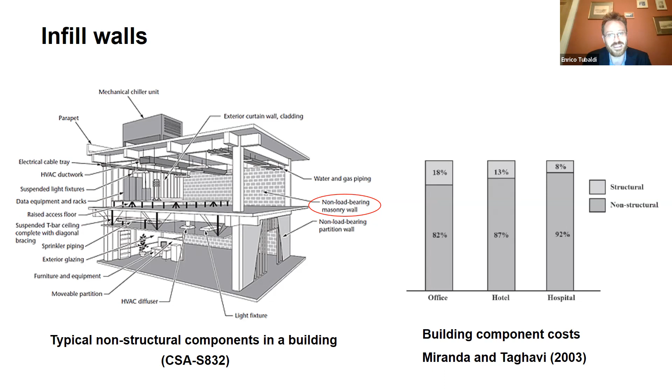These are tables taken from a recent publication, showing that the overall cost for repairing infill walls in buildings in Aquila that were not completely collapsed and demolished, but were repaired after the earthquake. The contribution of the repair of the infills is on the order of 40 to 60% of the overall cost of repair of these buildings.

This gives you an idea of how important the direct losses due to infill wall damage are, and there's no need to mention how important also are the potential indirect losses arising from the damage to infill walls.

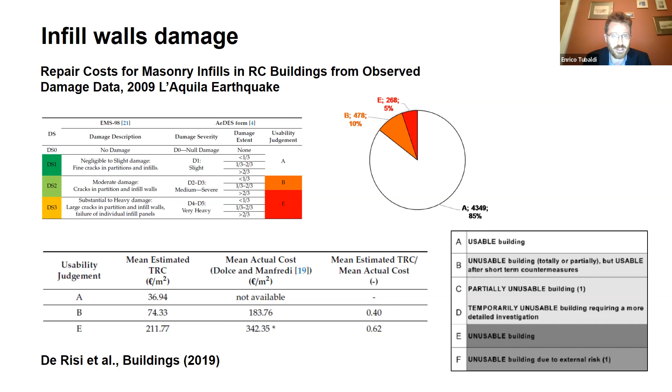I had the opportunity to visit some towns in central Italy after a notable earthquake sequence a few years ago, and I was in Fabriano and spotted lots of buildings that were not really damaged in the structural components, but had this type of double leaf infill walls that collapsed.

Not far from the building on the left, there is a school, a reinforced concrete building that was retrofitted prior to the earthquakes with the addition of high damping natural rubber dampers. These dampers were designed by TARRC Rubber Research Center, in particular by Hamid Ahmadi. Thanks to this, the school building didn't experience any damage during these earthquakes.

Now, looking at these two pictures, one may already come up with the idea of why not combine these two systems, the infill wall and the rubber-based dampers, into a single system that can exhibit better performance under earthquake loading, so that the infill wall is not damaged, and we are also able to improve the performance of the reinforced concrete frame by adding a source of energy dissipation. This is the idea at the base of the use of rubber joints within infill walls, as I will show you later.

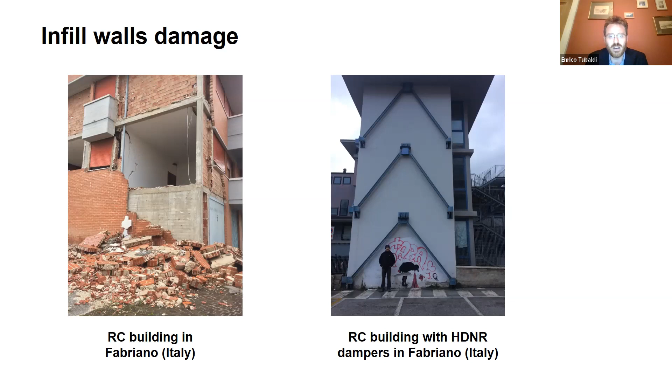But first, let's make a brief description of the techniques for infill wall protection that are already available or have been developed in recent years. I've classified them into two categories: the first are techniques aimed at increasing infill resistance, and the second is the class of techniques aimed at minimizing the infill-frame interaction.

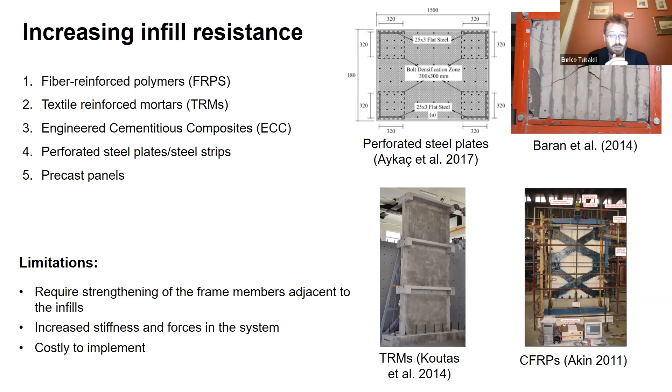In the first category, we have fiber reinforced polymers or reinforced plasters aimed at increasing the resistance of the infill. But these techniques have several limitations, in my opinion, because they result in increased stiffness and forces in the system, which is very bad for non-structural components, particularly acceleration-sensitive ones. They often require strengthening of the frame members adjacent to the infills and are usually costly to implement.

On the other side of the spectrum, we have techniques that aim to minimize the interaction between the infill and the frame, or increase the flexibility of the infill. For example, using locked brick infills, introducing gaps between the infill and the frame, or using sliding flexible layers between the mortar joints or between the infill and the frame. These, in my opinion, are very advantageous thanks to minimal interaction with the building's structural components, reduced increase of global stiffness of the system, and the fact that in some situations they may add energy dissipation to the system.

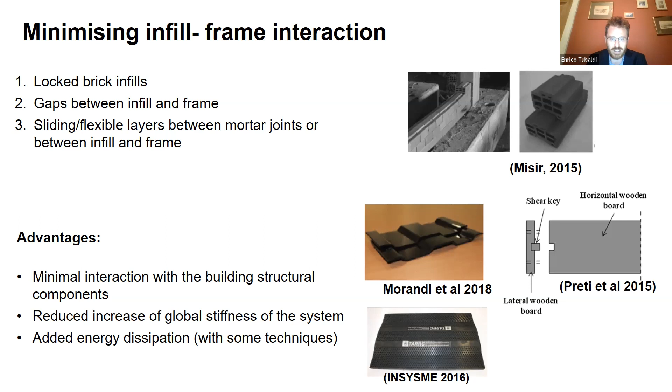The INSYSME project was an EU-funded project that ran between 2013 and 2016, and within this project, some of these techniques for protecting infills were explored.

And among these techniques, the most promising one that emerged was the one involving the use of these rubber joints in the form of horizontal layers that basically divide the infill panel into a series of subpanels, and the vertical layers that are placed between the infill panel and the columns.

TARRC Rubber Research Center have developed two types of joints, DRES-V1 and V2, that have this special shape in order to achieve a sort of orthotropic behavior, which is preferable to improve the out-of-plane capacity of the infill wall. And DRES-V2 presents a series of pins in order to improve the bond between the rubber and the mortar.

And then there are other types of joints that are commercially available and also made from recycled rubber in order to reduce further the cost of the technique.

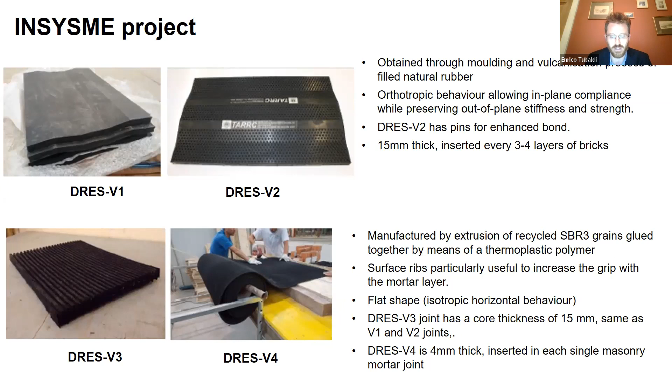And in the INSYSME project, in particular, University of Padua have provided a proof of concept of this technology by performing a series of quasi-static tests, in plane and out of plane.

So basically, they built a series of reinforced concrete frames and filled them with different typologies of infills. So on the right, you see a traditional type of infill wall construction. On the left, the infill wall with the rubber joints.

These have been tested first under in-plane loading by pushing them up to drift levels of 2.4%. That corresponds to a quite significant deflection for the system. And this has resulted in severe cracking in the traditional infill frame and also crushing in the blocks for the traditional infill frame.

Whereas you see for the same level of deflections, the infill wall with the rubber joints experience almost no damage.

On the right, you see the static responses of the two systems, and it's already very evident that the system with the rubber joints is characterized by more stable and fat cycles with an equivalent damping ratio, which is of the order of 11 and 12%, and is significantly higher than the one that is achieved normally in traditional infill structures.

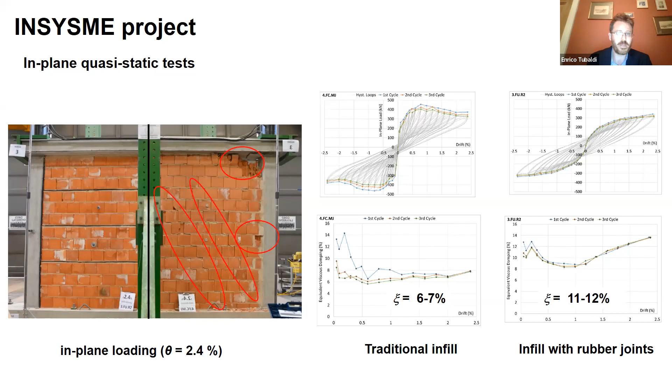And then obviously minimizing the in-plane damage has also benefit in terms of improving the performance under out-of-plane loading. And further tests carried out at University of Padua has shown how with the rubber joints it's possible to achieve out-of-plane capacity that are comparable to the ones that will be obtained for the traditional infill case.

Now, the INSYSME project has provided a very nice proof of concept and demonstration of the capabilities of this technology, but has also left us with a series of knowledge gaps that need to be filled.

And here comes the work carried out thanks to the EEFIT prize on advancing the modeling of RC frames with infill rubber joints and on experimental testing for characterization of rubber mortar joints. So I'm going to describe this now, starting from the first.

Whose research objectives were to develop advanced modeling strategies for the assessment of the type of structure at hand, and also develop simplified modeling strategies suitable for investigating larger structures. And then another objective was to provide some recommendation for the optimal design of the rubber joints.

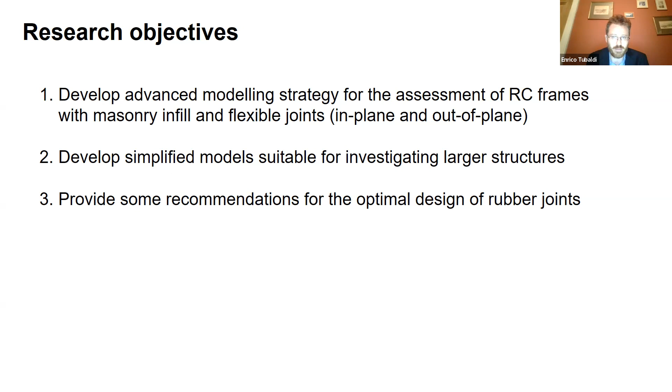So now there are different techniques that can be adopted for modeling the infill panel with the rubber joints. And we have explored, in particular, a mesoscale modeling approach, a macroscale modeling approach, and a microscale modeling approach that I'm going to discuss more in detail in the next slides.

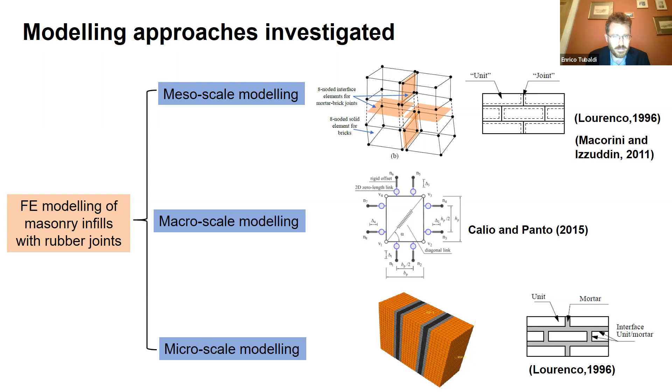So the mesoscale modeling approach for the infill construction basically involves using a set of solid elements for describing the bricks. So basically for each brick, we have at least one solid element, but usually we have more than one. And these solid elements are then connected one to each other through zero thickness interfaces. So that corresponds basically to shrinking the actual thickness of the joint, that is a few centimeters, into a zero thickness element without losing much of accuracy in the response assessment.

And then we use also interfaces for describing the interaction between the infill panel and the adjacent RC members. And for the RC members, we can use different type of description. In this work and this research that has been recently published in Engineering Structures, in particular, we use, again, solid elements and embedded rebars for the steel reinforcement.

So now the core of this modeling strategy is the description of the zero thickness interfaces that must be capable of describing the main failure modes typical of masonry, such as cracking under tensile stresses or shear failure once the cohesion and the friction capacity of the bond is overcome. For this purpose, we have employed interfaces available in Abaqus with an uncoupled elastic response and with some damage model that describes the peak and post-peak behavior.

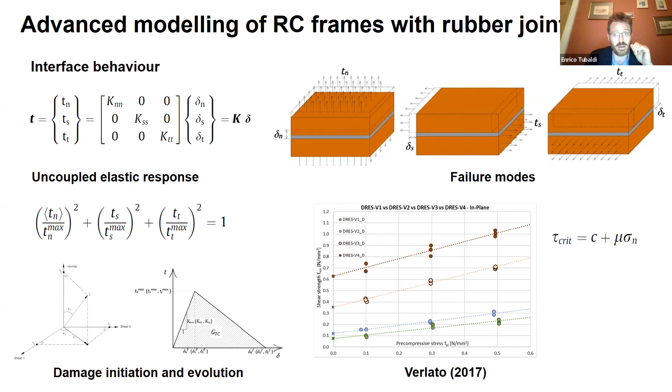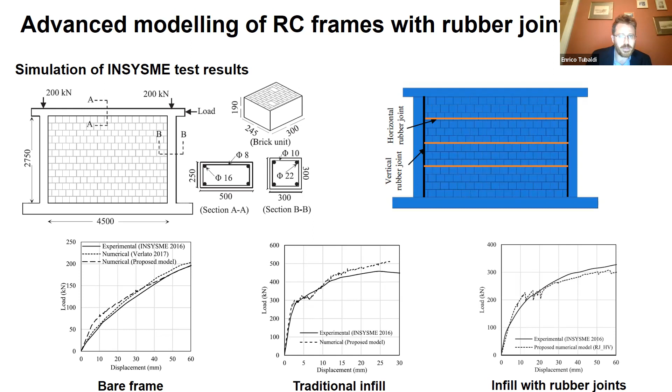And on the right, you see the so-called pushover curve, so the load displacement curve under in-plane loading, for the case of bare frame, traditional infill frame, and frame with infill and rubber joints. And this shows that the rubber joints are effective in increasing the flexibility of the system and reducing the interaction between the infill and the frame, so that the response of the system is quite close to that of the bare frame, as sought.

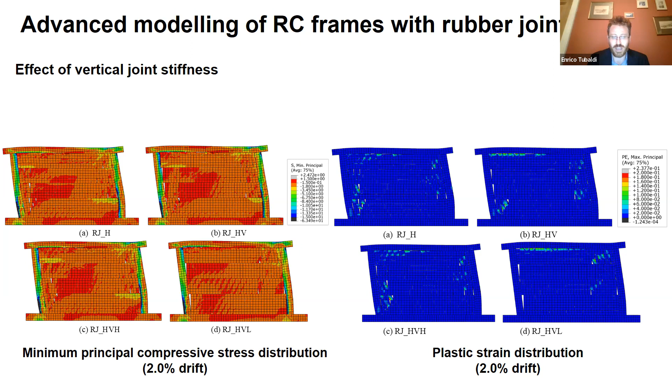However, you can already have an idea of how computationally expensive such a technique can be, so that it cannot be really employed for simulating the response of larger scale structures under dynamic loading. And for this purpose, we've been doing some work towards the development of a macro modeling strategy for simulating the problem at hand, using a reduced number of degrees of freedom and a few parameters required to define them.

Some of you may be already familiar with the use of strut elements for simulating the response of frames with infills. More sophisticated elements, such as these macro elements here, have been developed throughout the years. And we have worked together with Caliò and Pantò, together with Pratik, and we have, in particular, used their macro model for our problem. Their macro model consists in a simple articulated quadrilateral, shown here, with a diagonal link and a series of links located along the edges that describe the interaction between adjacent macro elements when subjected to sliding or axial actions.

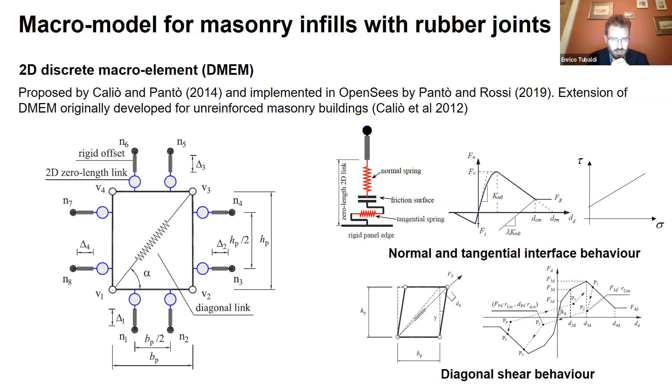And this type of macro element, recently implemented in OpenSees, is capable of describing the most critical failure mechanisms characteristic of infilled structures, particularly the masonry component, such as masonry crushing, sliding crack formation, diagonal crack formation, as well as the detachment between the infill and the frame. Obviously, we needed to expand this macro element a bit in order to make it suitable for our problem, and there is no time really to describe in detail this research that is going to be published soon.

Anyway, the most critical parameters for these elements are the parameters that control the behavior of these springs here that represent essentially the behavior of the horizontal joints, where most of the deflections are localized, basically.

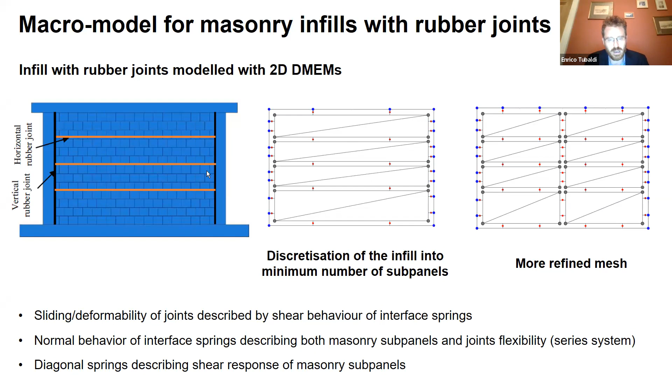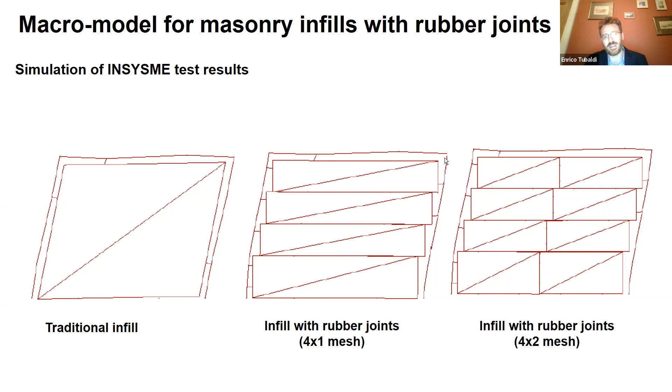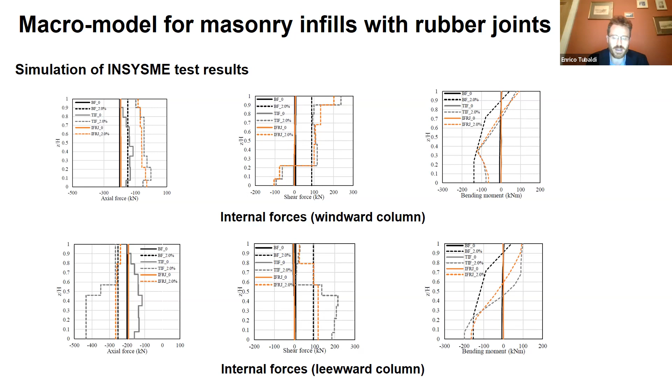We have made some comparisons also with the pushover curves and the cyclic responses, and the proposed modeling strategy provides a very good fit to the experimental test results. And we use also force-based formulation for the adjacent column and beam members, and this allows us to have an idea of the internal forces arising within the reinforced concrete frame due to the interaction with the infill. And in general, we have observed that the case with rubber joints results in reduced internal forces in the columns compared to the case with the traditional infill, or even to the bare frame.

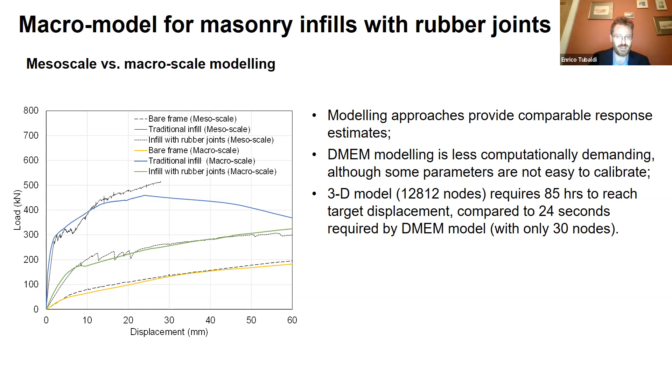So now I'm going to move quickly to the other topic, the experimental testing of masonry triplets. And the research objectives of this task were to investigate the energy dissipation capabilities of the mortar rubber joints, characterize experimentally the hysteretic behavior and capacity of the triplets with mortar rubber joints, and calibrate alternative models for simulating the response of these devices and the infilled frame.

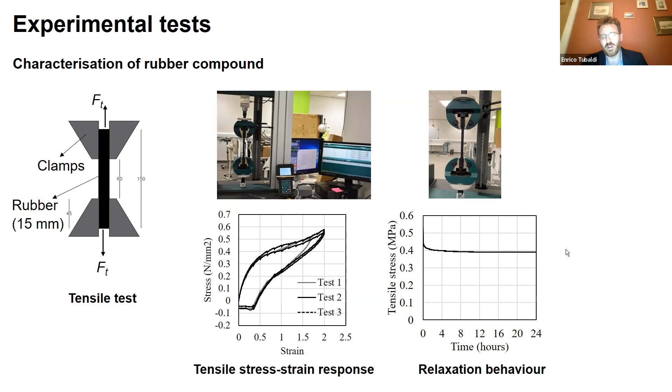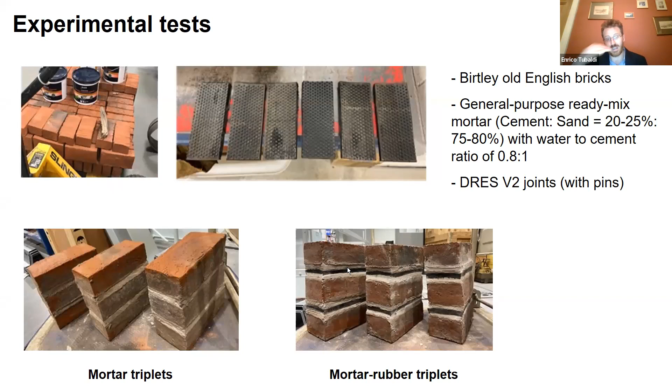And then Pratik has produced a series of triplets made by using Birtley old English bricks that were available locally, and bonding them using a traditional technique involving only mortar, or using the mortar rubber joint alternate layers. And then we have developed a quite unconventional test setup for testing these triplets. This setup is unconventional in the sense that the traditional test setup, the one acknowledged also by the Eurocodes, allows to test the triplets only under monotonic loading. Here, on the other hand, by adding a few threaded bars and plates, we are able also to test the triplets under cyclic loading, which is very important in order to gain insight into the hysteretic behavior of the joints.

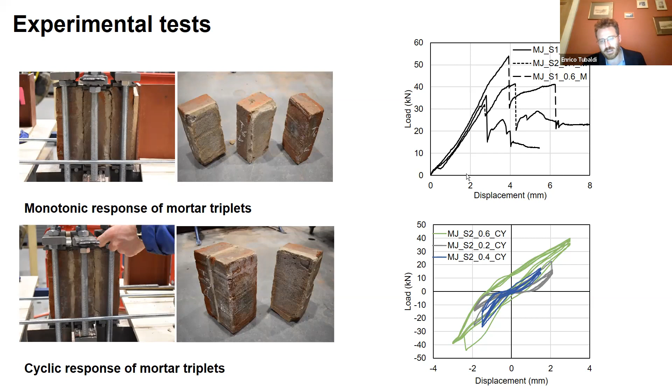In general, we have observed that for all the tested triplets, failure occurred in correspondence of the bond between the rubber and the mortar, despite the use of these pins that are supposed to increase a bit the bond capacity. So this bond is actually the weakest link of the system. This is a quite important result.

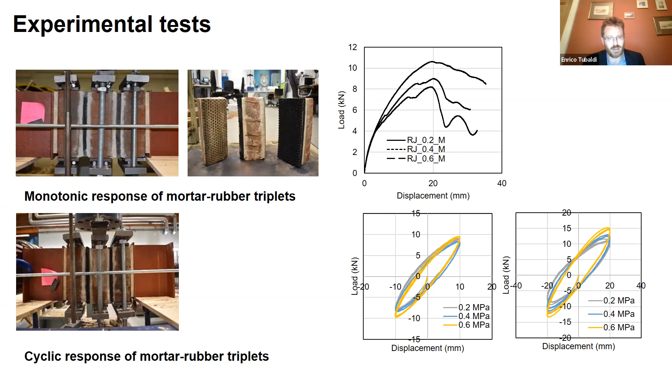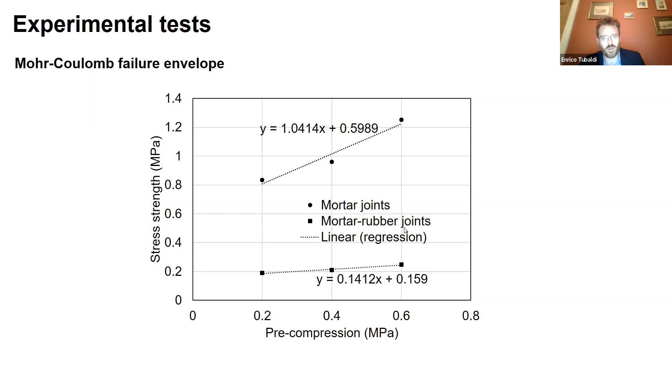We have also been able to fit the Mohr-Coulomb failure envelope, the Mohr-Coulomb criterion for the failure of the bond in the case of traditional mortar joints or mortar-rubber joints, and these have been used to inform a numerical modeling strategy. This numerical modeling strategy is a micro-scale strategy because here we are using solid elements also for describing the behavior of the joints. This is different from the mesoscale approach where we use zero-thickness interfaces.

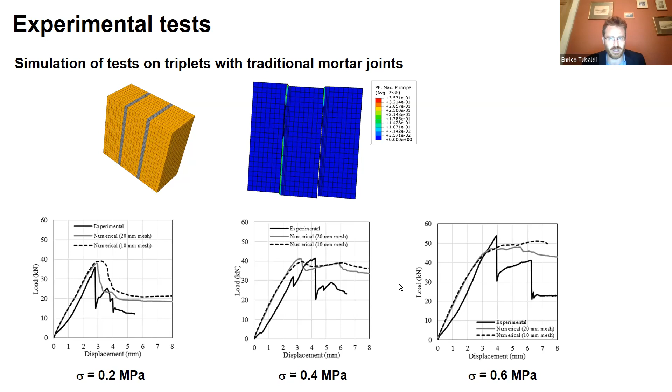And this type of strategy is unavoidable for the problem at hand because the models available for the interfaces are overall quite poor and are not able to capture the very complex behavior characteristic of the rubber joints. Again, some comparison with experimental results here for the traditional mortar joints. And then we move to the rubber case.

And obviously, in order to describe the rubber, first we need to fit a reliable model for describing the material. And this has been done considering the tests carried out on the rubber pieces. And we've been able to fit quite well a material model that employs in parallel a Yeoh hyperelastic material model plus a hysteresis model from Bergstrom and Boyce. And the parameters of these have been calibrated against tensile test, shear test, and relaxation test, with a very good fit being obtained.

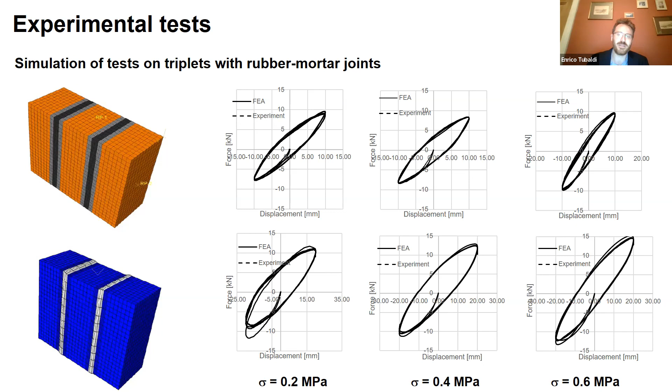And then using this model of the rubber, you see here we have developed the model of the triplets, considering also the actual thickness of the rubber as well as of the mortar layers. And on the right, you see the comparison between finite element analysis and experimental results for all the cycles of deformation imposed, considering different amplitudes and also different precompression levels. And we are very surprised that there is an almost perfect match between experimental results and finite element analysis results. This is even too good for us.

So some final remarks on the experimental test. We have developed an experimental setup that is quite unconventional and that has allowed us to investigate the cyclic behavior of the triplets. We have found that the rubber layer-mortar bond is the weakest component of the triplets. And this is very important. It means that we need to do some more work in order to enhance the bond behavior in order to be able to fully exploit the capabilities of the rubber in dissipating energy, even though we must say that failure of the bond doesn't imply failure of the system. And we can still rely on the frictional sliding to dissipate energy.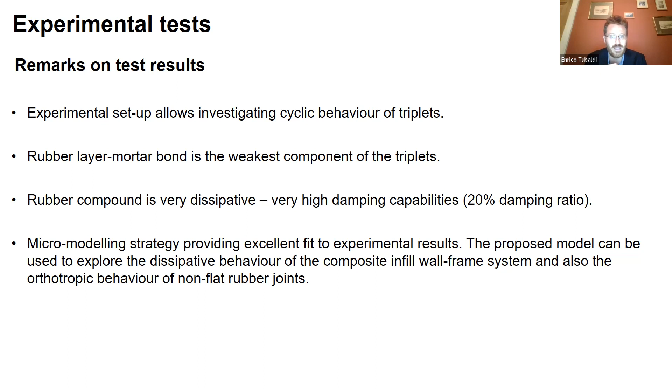We have also found that the rubber compound is very dissipative and characterized by very good damping capabilities that definitely need to be exploited in order to protect the frame. And we have defined and calibrated a micro modeling strategy that has provided an excellent fit to the experimental results. So now this leads me to the conclusions and future study section.

We have shown through experimental and numerical tests the potential of rubber joints for protecting infills and enhancing the performance of infilled frames through a series of mechanisms that involve minimization of infill damage, reduction of interaction between infill and the frame, reduction of global stiffness of the system, and enhancement of energy dissipation capabilities of the system.

We have developed numerical modeling strategies with different levels of complexity in order to investigate not only the local behavior of the components through the use of micro and mesoscale models, but also the performance of larger scale systems thanks to macro models that are characterized by very few degrees of freedom. And then the experimental test results have been very useful for calibrating FE models, and they will be used in future studies. And in fact, here comes a long list of future tasks that we will be working on, starting from the modeling of the combined in-plane and out-of-plane behavior of the system.

And then we will develop strategies for the optimal design of the geometrical and mechanical properties of the joints, and investigate further the dynamic behavior and damping capabilities of masonry infilled frames with rubber joints. So basically, we're going to evaluate what is the level of composite damping that can be achieved, which is somehow in between the damping of the rubber, which is of the order of 20%, and the damping of the frame, which is of the order of 5%. And we know that we're going to achieve levels up to 10 to 15% of damping ratio.

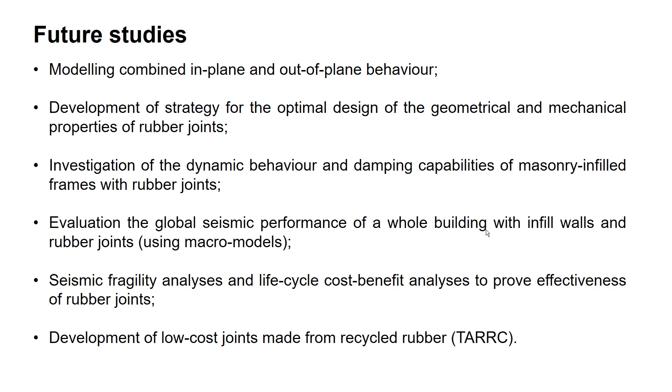Hello, Roberto Gentile from UCL here. Enrico, thanks for the presentation. It was very interesting. I'm just curious about the new strategy to model infills. How much more complicated is that with respect to single strut or multiple strut models? And especially, with the same macro modeling strategy, can you account for traditional infills and special infills as well, like sliding or the ones you have developed?

Thank you so much. Yeah, very good point. Of course, I haven't got the time to show the results of the calibration and validation for the macro element models. But basically, with the same macro element that is now available in OpenSees, by properly tuning the parameters, which requires a bit of work anyway, you can really simulate both the case of traditional infills and the case of infills with rubber joints. So we're using an element that is already available in OpenSees. There is only a bit of work to be done in terms of calibrating the parameters.

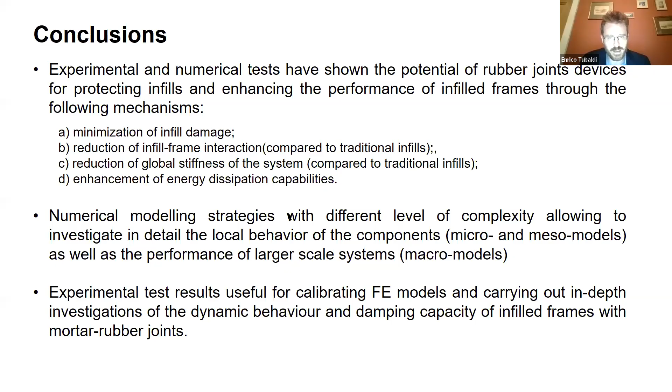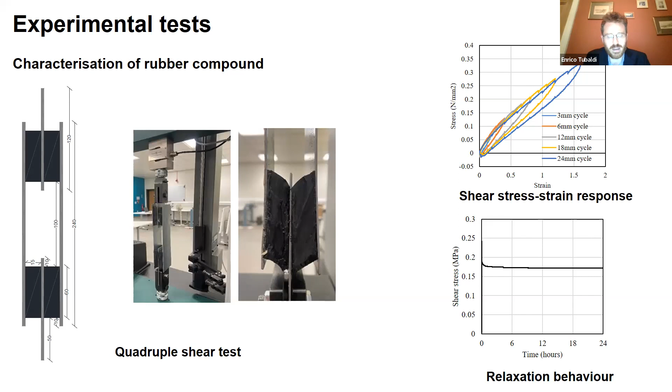replace the panel. And in fact, there are some technologies that use sliding joints instead of rubber joints for protecting the infills. But out-of-plane behavior may be a concern in these situations, and this may increase a bit the vulnerability under out-of-plane loading, not having a restraint provided by the rubber in the out-of-plane direction. I hope this answers your question.

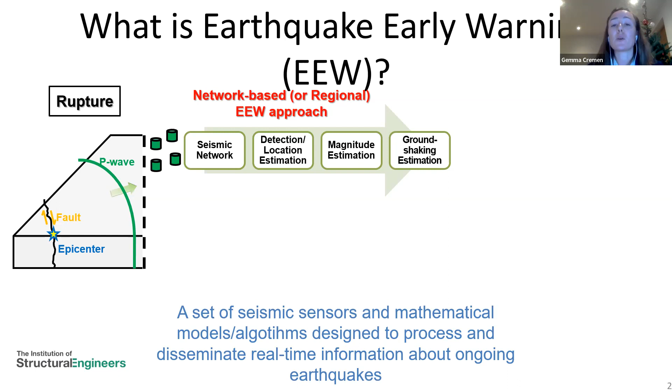This approach to earthquake early warning is called a regional or network-based earthquake early warning approach. But we can also have an on-site approach, where one seismic station is located close to a particular structure or infrastructure of interest. This detects and processes the incoming waves, and algorithms translate that information directly into ground shaking estimates at that particular structure or infrastructure.

The next component of earthquake early warning is the decision module, where we take all the information generated and processed in the previous steps and use it to decide whether or not an alert should be issued, so that people can take protective measures before the stronger S waves from the earthquake hit their location or region of interest. So that's just a background on what earthquake early warning is.

We did a general literature review on different methodological approaches to earthquake early warning across the world. What we identified is that there are 9 earthquake early warning systems currently in operation around the world, but a further 13 are being actively tested. And these figures are evolving day by day.

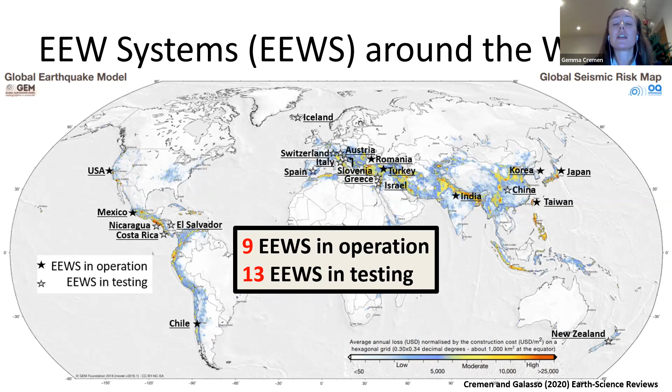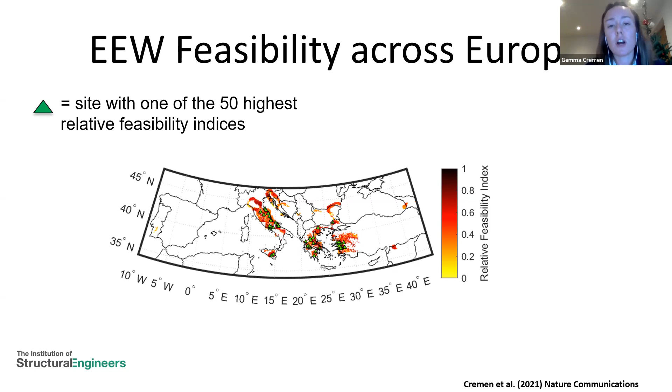Something we noticed throughout our literature review was that there's very little earthquake early warning currently operational in Europe. So we decided to do a feasibility study for earthquake early warning in Europe, understanding which areas of the continent could particularly benefit from this type of infrastructure, with the idea of informing future implementations of this technology across the continent. What we found was that earthquake early warning could be particularly appropriate for areas in Turkey, Italy, and Greece.

The feasibility study was done on the basis of 3 criteria: the population that lived near a particular site and was exposed to earthquakes that might affect that site; the shaking that site might experience from nearby earthquakes; and the lead time, the amount of time somebody would have to react to an earthquake early warning alert before the strong shaking from the earthquake hit them.

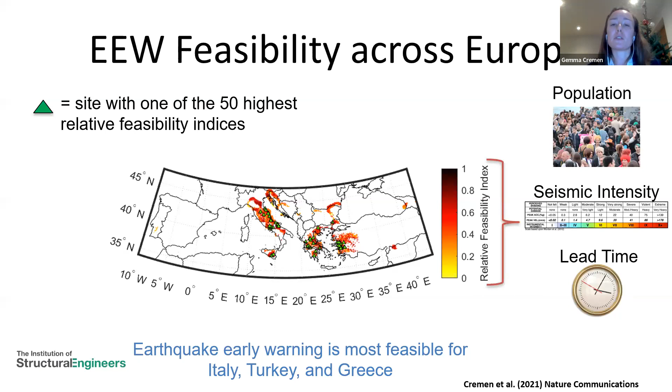As part of our literature review, we also looked at the underlying algorithms associated with each of the operational earthquake early warning systems worldwide. I'll go into detail on various ones of these algorithms in the coming slides. So let's look at how these algorithms detect and locate earthquakes. Some algorithms use data from triggered stations, meaning they look at all the stations that have so far detected a P wave from the incoming earthquake, and then use that information in a grid search to determine where the earthquake might be located.

Other algorithms also make use of the locations of stations that have not yet been triggered, so have not yet detected a P wave, and they use this information to better constrain the location of the incoming earthquake.

And then we also have algorithms that rely on data from just single seismic stations. So various algorithms that we showed on the previous slide are associated with these different methodological approaches.

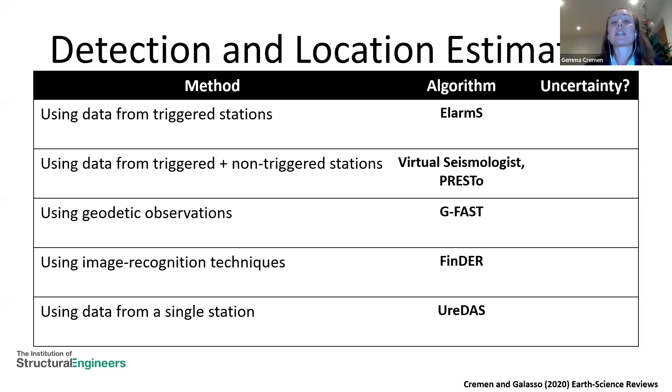Something we were particularly interested in during our literature review was the treatment of uncertainty at each stage of the earthquake early warning process, because each of those estimates of location, magnitude, and ground shaking will be associated with a certain level of uncertainty, and that uncertainty is particularly important when we get to the decision-making part of earthquake early warning, understanding whether or not we should issue an alert.

What we found is that very few of the algorithms we studied actually capture, handle, and propagate the uncertainty associated with the earthquake location estimates. Virtual Seismologist and PRESTo are the algorithms we found that actually handle this uncertainty, and they both operate within a Bayesian framework.

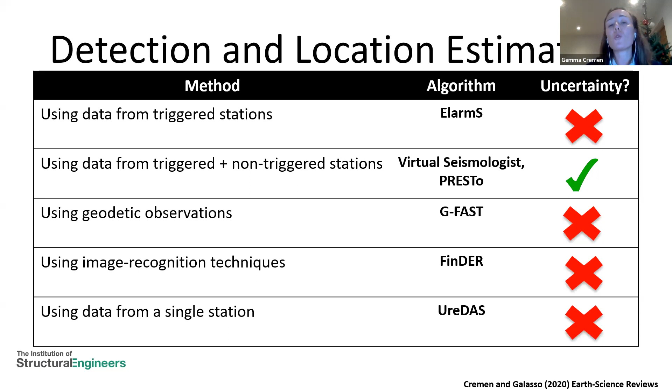Now let's move on to how these algorithms estimate magnitude. What we found is that some of these algorithms estimate magnitudes using empirical relationships between early information provided by the P wave and the magnitude. Then some of them use a longer time frame using similar empirical relationships between the P wave information and the magnitude, but over a longer time frame of P wave information.

Of course, these are more accurate, but if we're using a longer amount of P wave information, we're therefore reducing the amount of time that people have to react to an alert. So there's a balance there between accuracy and timeliness always in earthquake early warning.

Some algorithms, again, use geodetic observations. There's also some algorithms that use empirical relationships between rupture length, which they estimate, and magnitude. And then other algorithms that use data from just a single seismic waveform. So again, a variety of the algorithms we studied were associated with these different methodological approaches.

And again, only a few of these algorithms actually handle uncertainty. It's again Virtual Seismologist and PRESTo, both of which operate within this Bayesian framework.

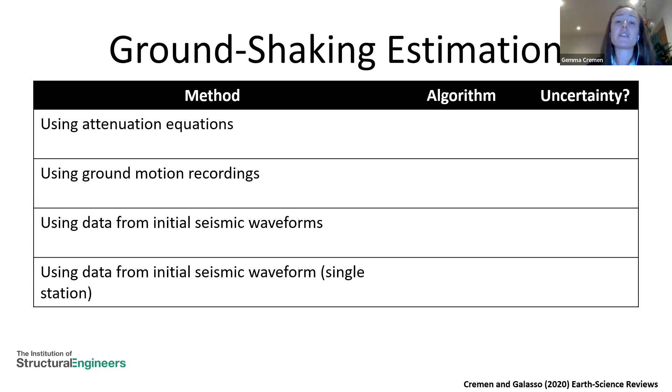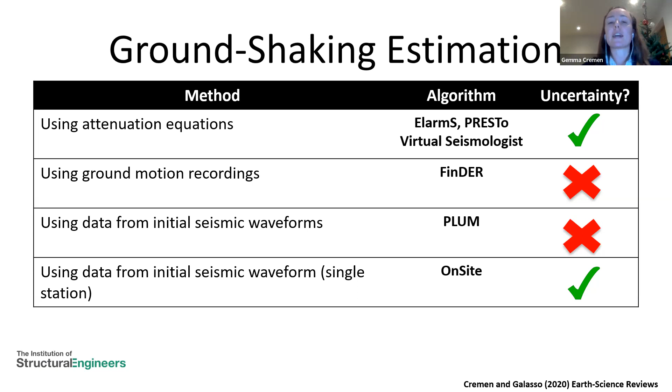We also have algorithms that use data from initial seismic waveforms, either from many stations or from single stations. Again, only a few of the algorithms handle and propagate the uncertainty associated with the ground shaking estimates. And it's important to mention here that Virtual Seismologist is actually the only one we noticed that propagates the uncertainty from the magnitude and the location to the ground shaking estimate as well, which is also important.

So let's move on to the final component of an earthquake early warning system, which is the decision module. How do these different algorithms make decisions on whether or not an alert should be issued for an incoming earthquake? What we saw is that some of the algorithms make a decision based on the predicted magnitude of the incoming earthquake. A decision rule in this case might be: trigger the alarm if the predicted magnitude of the incoming earthquake exceeds magnitude 6, for example.

Then other algorithms also combine the magnitude information with epicentral distance to make a more nuanced decision on whether or not to issue an alert. And then other algorithms make use of ground shaking estimates and also seismic intensity measures, which are derived from the ground shaking estimates. Here's a variety of algorithms associated with the different methodological approaches.

But let's just focus here on one thing in particular, which is the different metrics that are used to make a decision. So all of these metrics are seismological parameters. And this makes sense if we consider the history of earthquake early warning, because earthquake early warning was originally developed by seismologists.

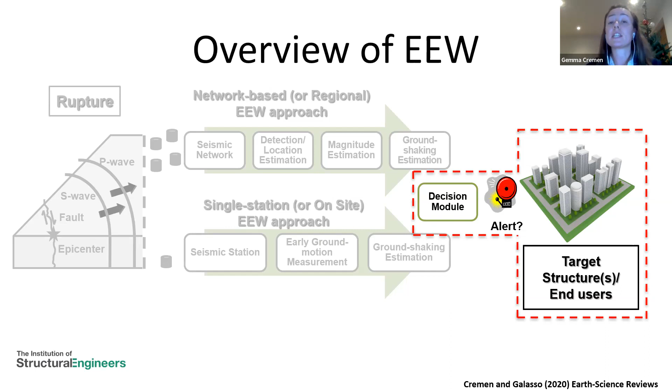Based on our identification of the limitations associated with the decision module in earthquake early warning, we proposed an advancement in conventional earthquake early warning systems: to use risk-based decision metrics for the decision module. But not only that—to use risk-based metrics that were of particular interest to stakeholders, and metrics that stakeholders could understand, so that they are better engaged with the whole earthquake early warning process.

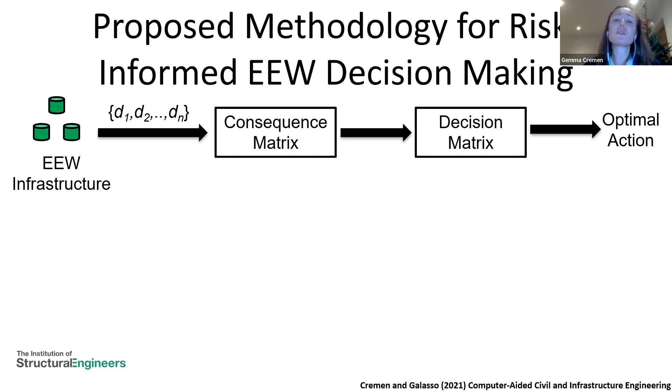On the basis of this recommendation, we went ahead and proposed our own risk-informed decision-making approach for earthquake early warning. The first step involves taking seismological estimates from our earthquake early warning infrastructure, which are the conventional outputs of operational earthquake early warning systems around the world. But that's really where the similarity with conventional systems ends.

What we do is take earthquake engineering assessments and combine the seismological parameters with these assessments to determine estimates of the damage and loss associated with the incoming earthquake. Then we take advantage of performance-based earthquake engineering to ensure the metrics are interpretable to stakeholders. We use metrics here like repair cost, repair time, and casualties.

The next step involves taking the consequences, summarized in the consequence matrix, and translating them into the decision matrix by also accounting for stakeholder input. Stakeholders can tell us which of these metrics they're particularly interested in—would they prefer to minimize casualties over minimizing downtime, or vice versa? We can then account for this in our ultimate decision.

The output of our risk-informed decision-making approach is the optimal action. We either trigger the alarm or we don't, based ultimately on the incoming seismological information from the earthquake early warning system, which in the meantime has been translated into engineering-based damage and loss predictions.

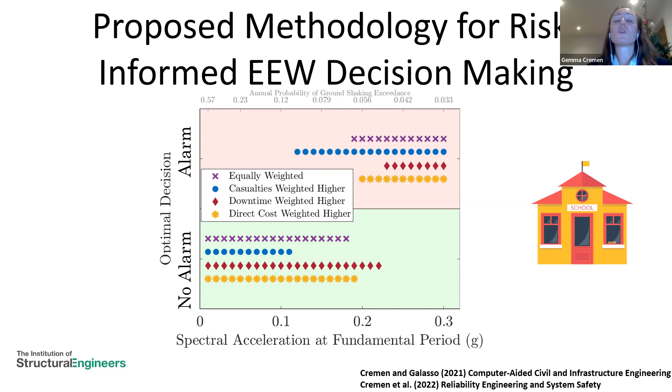What's obvious from this graph is that the optimum decision for a particular level of ground shaking associated with the incoming earthquake can change depending on stakeholder preferences toward the underlying metrics. Here we focused on casualties, downtime, and repair cost.

We saw that if the stakeholder prioritizes minimizing casualties, they'll actually end up triggering the alert at a much lower level of shaking than if they prioritized minimizing downtime, for instance. So stakeholder input is really important in the earthquake early warning process.

The beauty of this type of methodology is that we can compute this plot ahead of time, before any earthquake happens. In real time, we simply consult this plot with the estimate of the incoming ground shaking, allowing for efficient decision-making in real time.

Another advantage of this approach is that we can code it as a plugin, and it can be used in operational earthquake early warning systems worldwide.

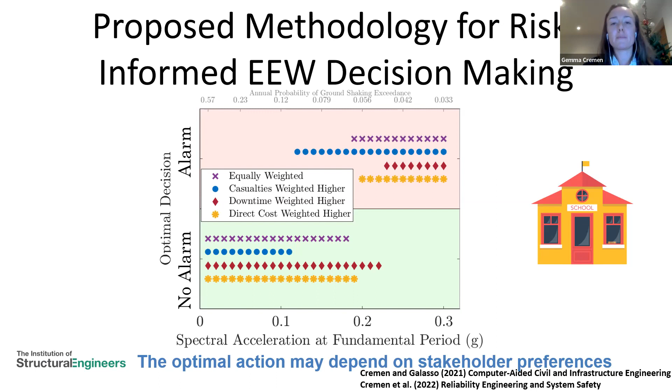As part of another literature review, we identified challenges associated with earthquake early warning across four different dimensions. In this talk, I covered the operational sphere, or the technical part of earthquake early warning. In the next part of the talk, Gianluca will talk about the other three spheres. Thanks very much for listening.

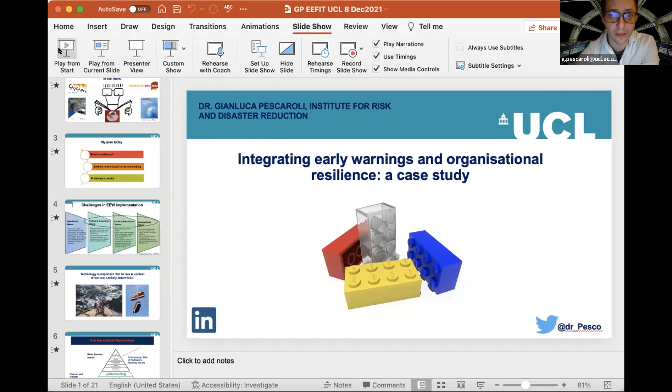I'm going to present the outcome of our project integrating earthquake early warnings into organizational resilience, and I will go to the case studies. So in reality, my presentation will focus on some other aspects, more the practical implications of the study. But the point is that I'm going to do that from a social science perspective.

As you have heard, my background is very different from the ones you heard until now and that you are used to. I've been with the research group on cascading disasters since 2016, worked on national disaster risk assessment guidelines for the United Nations, in particular worst case scenario assessment, contributed to Science for DRM around 2020, and I've been working on other things with the United Nations, such as the hazard definition and classification review.

I'm always happy to have a coffee with colleagues in engineering and try to work more on the interdisciplinary side. And my presentation will focus a bit on that, to show you how we can merge the technical components of earthquake early warnings towards something more practical on the management of interruptions.

So first of all, I will try to give you an overview of what we mean by resilience in terms of continuity management. So not blue sky thinking, but how we practically integrated that in planning. The second step is that I'm going to explain how we translate that practically into a methodology for assessment. And then I will show you some preliminary results of one of our latest studies.

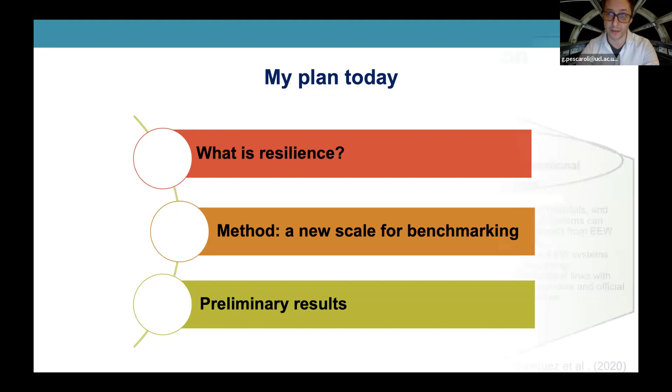The political and governance sphere and the social behavioral sphere that we are assessing refer to the fact that technology is important, but it's context driven and socially determined. It means that you can have the signal, but the signal has to be translated into procedures, has to be translated by people, has to be codified and has to produce behaviors. Otherwise, the signal itself is not going to work.

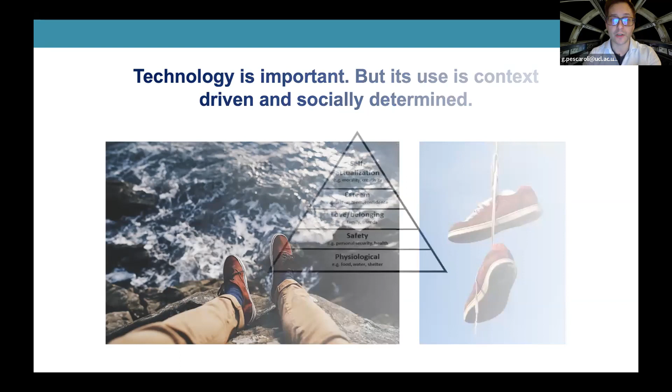For example, for different levels of wealth, different levels of communication, different levels of education, different levels of organization, practice and governance. So when we are thinking about the operational component, we see these other spheres in terms of society, how society codifies the signal, and which are the conditions under which the signal is codified and translated into action. So I work in particular on continuity management and disaster management.

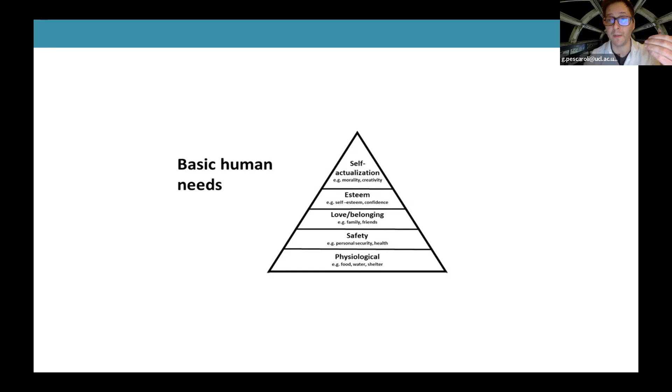Think about how reality changed in the last 20 years. We were used to thinking about disaster management as: there is the shake, we take action because people are hurt. However, the way we approach it in the field of continuity management, so how we keep things going and how we are going to use the signal, means we start to think about what is happening at the same time. So how this action relates to stress on the response systems, and also how to mitigate disruption to the technological basis of every single action we are taking.

That means, for example, we are talking now through the internet and Zoom. We already had technical issues for which we shifted from one platform to the other. But at the end of the day, we need energy, we need communication, and we need logistics to stay operational. So in all this context, it's what we are doing to keep the context going, how we are going to allow the response to the shakes, so how the signal is going to be processed toward society and organizations, to be translated into action.

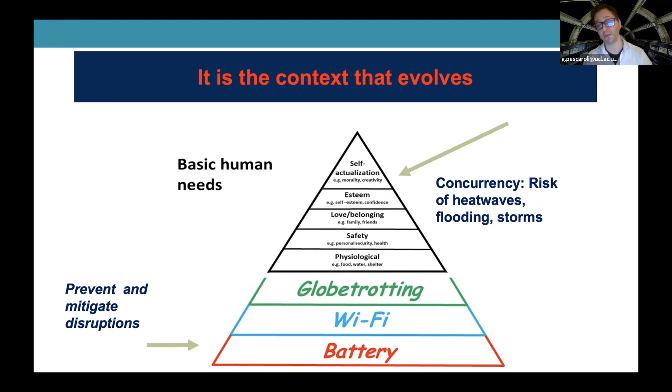And how can we use that to minimize the disruption, not just in terms of life losses and damages, but also how we keep things recovering faster, and how we can use technology to prevent and mitigate disruption on the technological side, so on the infrastructure side.

So we need to think, most of all, what is business continuity? What is business continuity? This is something that I approached in the last year. First of all, it is the capacity to continue to deliver products and services within a set time frame during a disruption. And a disruption is an incident that caused an unplanned negative deviation.

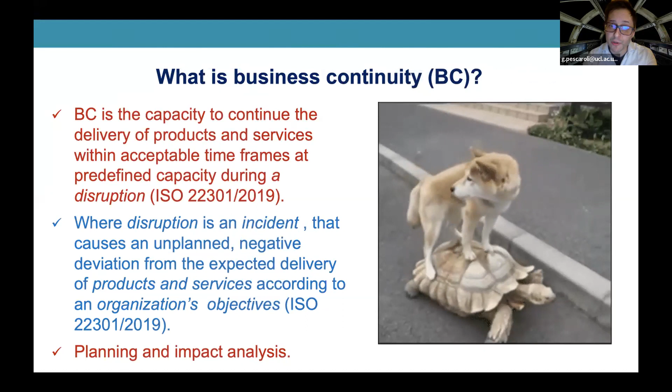It's simply going from point A to B in our everyday life. So the problem from a business continuity perspective is how we are going to use the signal to allow an organization to minimize the disruption and integrate it in planning. So the way business continuity works is knowing better the organization through a planning process that tries to understand which are the critical functions in each organization and what are the things that need to be recovered faster. Otherwise, we have increased loss and increasing impact.

So it's like when you are in a fight, if you know which are your critical points of failure, you can act to protect them and take the hit better. So I'm used to thinking of business continuity as a process that aims to contain physical damages, financial losses like downtime cost. So how much is it going to cost for a certain organization to be down? The loss of productivity, the need for communication and reputational aspects.

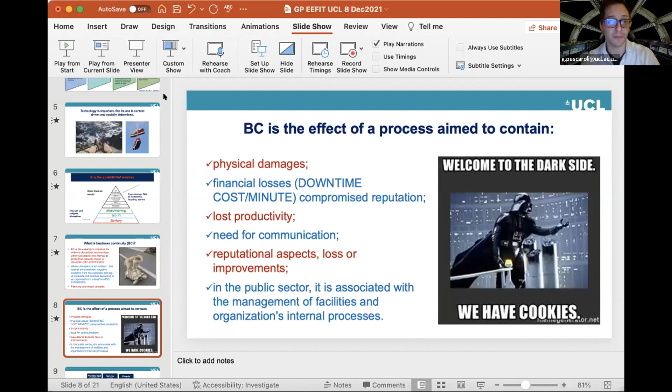Let me see now if the slide goes back to normal. Yeah.

So we can see the benefits are like compliance, in a context where there is a compliance request, like the example I just made, and downtime reduction. So it means that you are less likely to go bankrupt because your losses will be reduced, reduced exposure of employees, the protection of your market. Think you are in the private sector. If you get disrupted for 2 days instead of 2 hours, maybe you're losing reputation. Maybe you're losing clients.

And overall, it helps, by knowing your organization better, to maximize and produce a better output of what it is developing. Okay. So business continuity is one of the foundational elements that should bring something called organizational resilience. Organizational resilience can seem pretty abstract, and sometimes it is. It's one of those things where the risk of getting blue sky, of talking for talking, is very high. And often it is done to cover up.

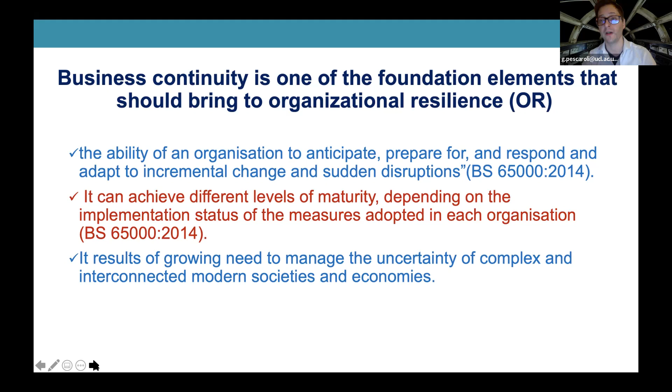But in the very basic assumption it is the ability of an organization to anticipate, prepare for, and respond to incremental change and sudden disruption, based on the standards. And for the British standard, there are also different levels of maturity, depending on the level of implementation and the measures adopted in each organization. It is a tool or a concept that can be used to adapt to situations of growing uncertainty and interconnected society and economics.

In all this, think about now, you have your signal. You have what my colleagues implemented on the engineering side. If we adopt a perspective of continuity management and organizational resilience, then the question changes. It's not just how the signal works. It becomes, what are the challenges and the operational criticalities that could limit the integration of that technical component into practices of continuity management? So how it will influence continuity planning, the creation of plans, procedures, and tools within an organization, or in larger terms organizational resilience.

So the flexibility of the organization itself as a whole, including the procedures, like the supply chain function, how you're going to shift to another supplier, or what you have to activate to stop a train that is running. Or if you are, for example, a very big industrial cluster, you have this signal. How are you going to use it to stop your most critical process, the one you cannot have disrupted for too long? How are you going to train your employees to do that? Or are you going to evacuate some employees more than others or not?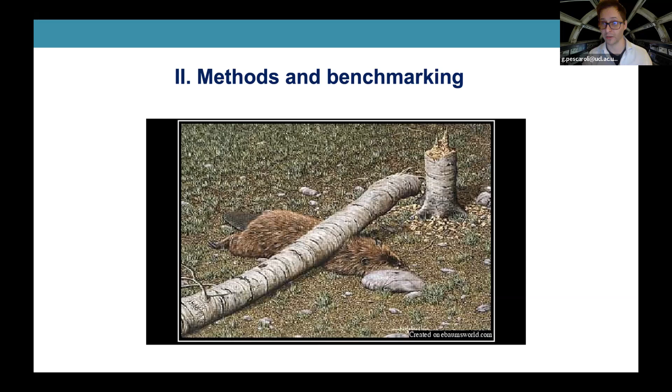So to do that, it was not easy. The problem was that we decided to try to apply something new, and we needed methods and we needed benchmarks. We decided on a case study, Mexico City, to create synergies between different projects we had and using some connections we had. This is a very particular case because of the many people; there are different levels of vulnerability and high exposure, as you all know.

In this case, the earthquake early warning evolved a lot since the 80s, with scenarios that could trigger an alarm from magnitude 5 and 6 if it is near the epicenter. So it was well developed. The signal was there. There were 12,000 warning speakers installed just in 2015, but there were some issues that we were aware of, and the literature stated very clearly.

There was, first of all, a conflict between public and private services. The one you see there is one of the private suppliers, taken from Wired, but you can see many, so many signals that may give different information. There were some steps in the legislation, so critical infrastructure was required to install these devices, but there were different gaps and confusion in terms of governance, and not all things were clear.

So there was the need for stepping beyond all this and trying to see it from an operational perspective, seeing how we can help organizations, when they have an effective signal, to translate it into something more useful to prepare, adapt, and recover quickly from shocks. So how can we translate that from being just a technical component into something that can help organizations better?

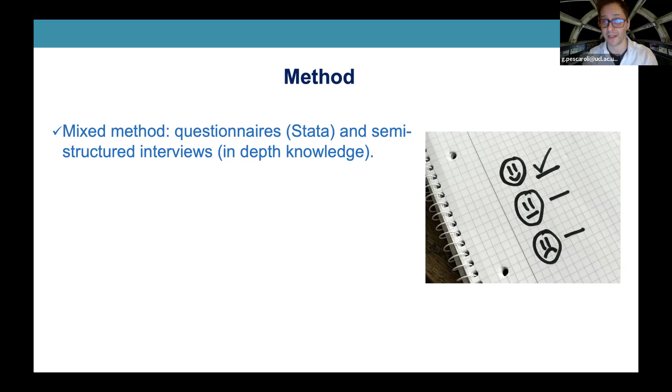The method we approached: we developed questionnaires, so Stata, and semi-structured interviews, so qualitative analysis for achieving in-depth knowledge. So we put the pie chart together with the qualitative understanding of what was going on. We targeted organizational representatives in the public and private sector and local academic experts. There was great field work with our former alumnus and student, Dr. Omar Velazquez. You can check his LinkedIn if you have time.

And we developed, thanks also to Omar's field work, a better connection with ARISE Mexico, which supported the data collection by forwarding the questionnaires within their network to the private sector, and the Autonomous University of Mexico.

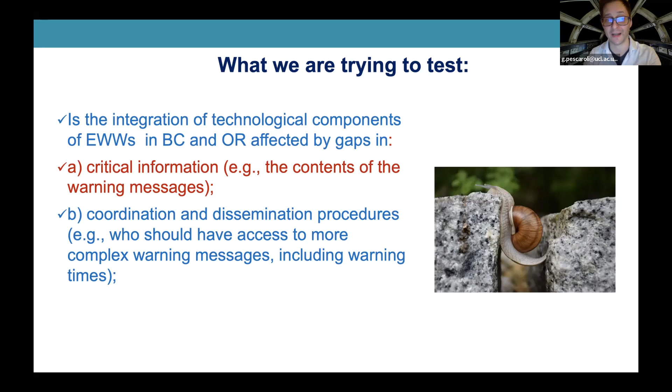So what we were trying to test is if the integration of the technological component of early warnings in business continuity and organizational resilience was affected by gaps such as critical information, the contents of the warning message, existing coordination and dissemination procedures, for example who has access to the warning, including warning times, how this related to the organization, the implementation of business continuity plans, training and education strategies. So how these technological components were implemented into something procedural and practical.

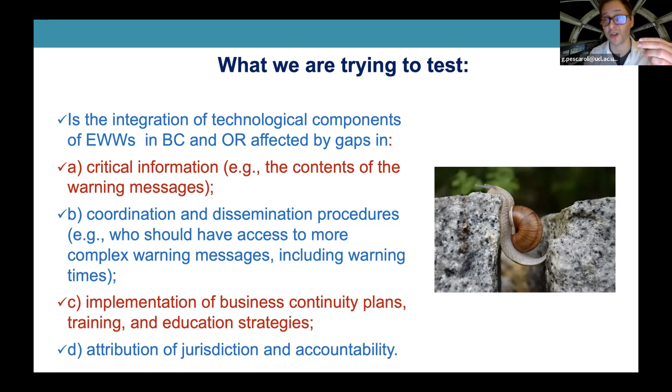And then if there were gaps in the attribution of jurisdiction and holding people, or organizations, accountable for doing something or not doing it. This was challenging. The first thing we did was ask how do we benchmark that? How do we measure it?

So in particular for the questionnaires and the qualitative analysis, we needed a tool. Normally in social science, we use something like a Likert scale, when somebody asks you stupid questions and says, please answer 1 to 5. That was not enough for that context, in particular for what we wanted to achieve. So we developed an adapted Likert scale model, easier for stakeholders that maybe didn't have the time or all the different levels of differences between things, and that was more approachable. That was published last year. So we had a value of 0 to 3 for doing the assessment.

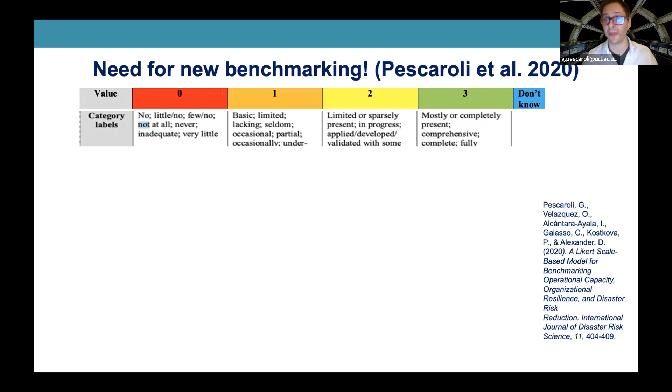So when we were asking questions, most of the questions were benchmarked to these values, from 0 to 3, where 0 was no or little, and then arriving to most, in a traffic-light-like system. So if you ask me how developed your business continuity plan is, where 0 is red, nothing, and 3 is a lot, I can intuitively answer.

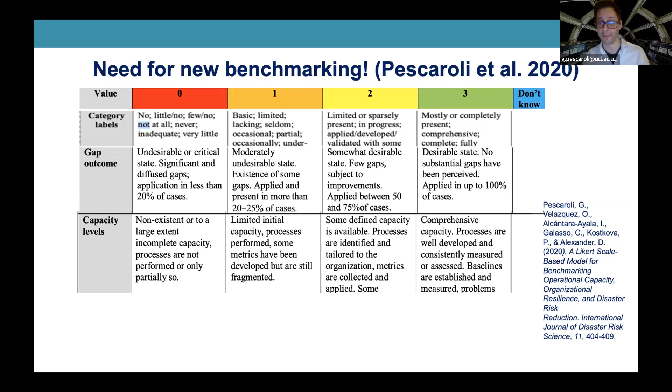Second point, the gap. We were trying to check a gap. The equivalence of 0 is an undesirable state, while 3 is the desirable state. Then capacity level, from non-existent to comprehensive capacity. And then resilience level, benchmarked to the British Standard 65000, from no measure taken to full development of strategies. So we developed this small answer system to look at the questionnaire and see, is there a capacity gap, or to what extent the respondent thinks that the organization is achieving resilience.

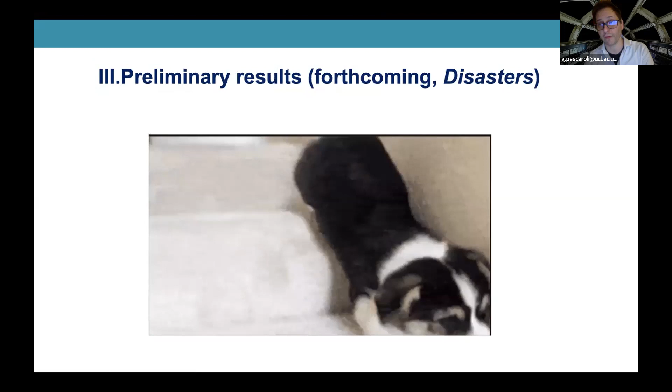And this is published in free open access. If you want to check it, you can also use it for your field surveys. The preliminary results look like that. And this is a forthcoming publication we have on disasters. We need to resubmit after revisions. But we had some very interesting outputs. I will go in a couple of minutes to the key findings.

We had quite a big data set considering the situation: 15 semi-structured interviews, 78 valid questionnaires from Civil Protection, education institutes, and enterprises. That for mixed methods is quite a lot. And considering that the ARISE network that includes private sector organizations is about 300 organizations across Mexico. There is a lot of informal reality in Mexico City that is not very accessible. So this data set is quite solid, we would say. It provides a complementary view from different sectors.

On the other side, we have seen that the response rate was very high, in particular in education, as they were supposed to implement earthquake early warnings. And in other cases, instead, they were pushing back a bit more, for example, the transport sector. But what we have seen is that there were discrepancies all across the data set. Even doing the statistical analysis in comparison, we have seen that the technical component was there, but when we think about the gaps we can face, it's not just a matter of challenges of dissemination, how the message is going to go through, it's how we integrate it into something else, how technology becomes something that can be done.

So, for example, here we can see the question of whether earthquake early warnings take into consideration how they can be integrated into organizational needs. Well, most of the answers are concentrated on the fact that the system requires updates. So it's quite mature. There has been a lot of progress, but it's not a desirable state, right? And in particular, it tends overall toward something that needs to be improved. And then we can see that one of the critical issues can be policies that are not updated.

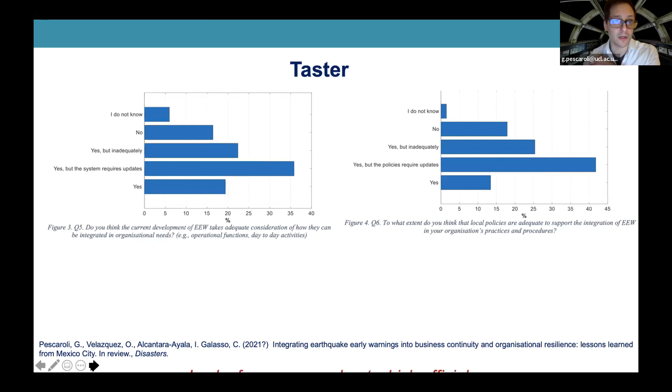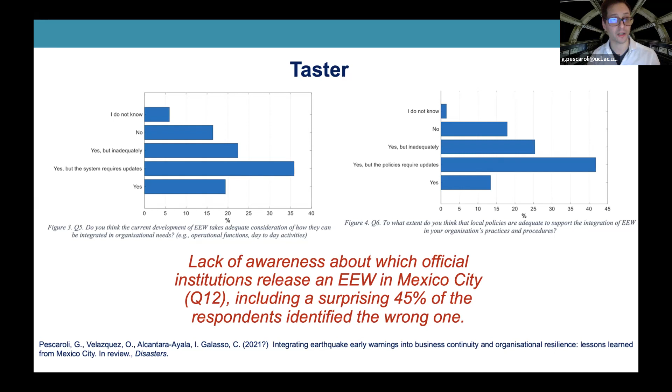And it's interesting to note that in the answers we also saw a critical failure. That was a lack of awareness about which official institution should release the warning, because half of the respondents got wrong who was supposed to lead the response. That reveals a problem between the public and the private components of earthquake early warnings that can orient how the organization then needs to plan and prepare.

So in terms of outcomes, in terms of suggestions, we've seen that we need to be aware of who manages the organization, the planning assumptions, and who is going to lead the signal.

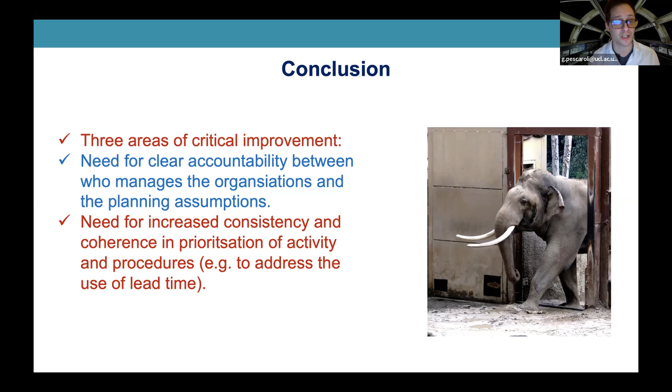But also increase consistency and coherence in how the activities are prioritized and to what extent this is going to be done. And this can be done just using improved training and education, including the use of drills that our data shows are not so efficient.

So as a whole, testing the case study, we've seen that even when the system is technologically well developed, there can still be critical gaps and lack of maturity in how the signal is translated into practice, planning, and preparedness procedures.

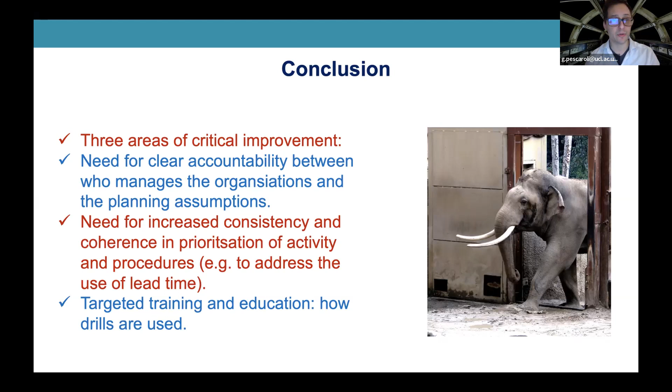So I'm happy to take any questions, and I hope that you found this interesting. I know that this is quite different from what you do normally, but this is something new that you can do when you face quantitative data or structural data, and you start to ask how you're going to integrate it in planning, in emergency management, not just from the technical perspective, but on how you can produce changes within organizations. So I think my time is over, and I'm looking forward to your questions if you have any.

I hope I didn't ruin your evening. I think you most definitely did not ruin our evening. In fact, that was fascinating from both of you. If there are any questions, please go ahead and put them in the chat. In the meantime, I had a quick question for Gemma. It'll be a quick one because I think our allotted time is until 7:30 anyway.

But I can't resist asking one question, and that is: the idea of having an early warning system that goes beyond just the seismological metrics and looks at the risk metrics as well sounds incredibly useful. Your example was for a specific hypothetical school, right? So is this a method that you foresee being for single buildings or for populations of buildings? And especially for the latter, do you think that the exposure and vulnerability data needed to get to an accurate and meaningful estimation of loss exists? Is that something further down the line?